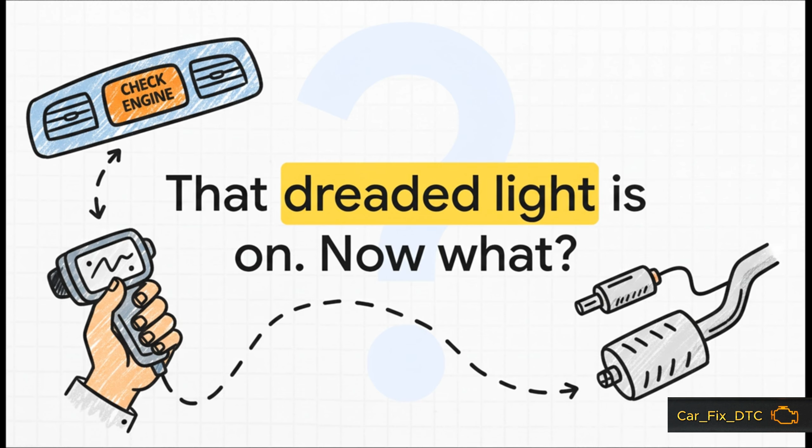So there it is, that little orange engine light staring you down. You plug in a code reader and it spits back this cryptic message, P0135. Now, I know that sounds like technical nonsense, but it's actually a super specific clue. Think of it like the start of a breadcrumb trail, and right now, we're going to follow it all the way to the source.

Here's how we're going to tackle this. First, we'll crack the code itself to really understand what your car is trying to tell you. Then we'll line up the usual suspects, the parts that almost always cause this exact issue. After that, I'm going to walk you through a simple step-by-step diagnosis you can absolutely do yourself. And finally, we'll land on the most common fix. All right, let's dive in.

Okay, first things first. What is your car's computer actually trying to say with this code? Remember, an error code isn't just some random alert. It's a very specific message, pointing to a very specific system that needs your attention.

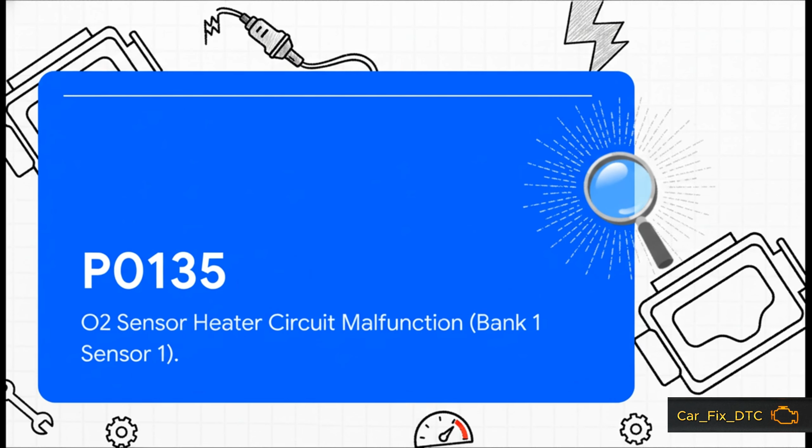So, P0135 directly translates to O2 sensor heater circuit malfunction, and it even tells us exactly which one, bank 1, sensor 1. Now, the most important words here are heater circuit. That's our big clue. It tells us the problem isn't with the sensor's main job of sniffing exhaust fumes, but with the little electrical part inside that helps it warm up.

Yeah, you can think of your O2 sensor as having two really important jobs. Its main gig is to measure the oxygen in your exhaust. It sends that info to the car's computer, which then fine-tunes the air-to-fuel mix for the best possible efficiency. But for it to do that job right, it needs to get really hot really fast. And that's where its second job comes in, a tiny built-in electric heater.

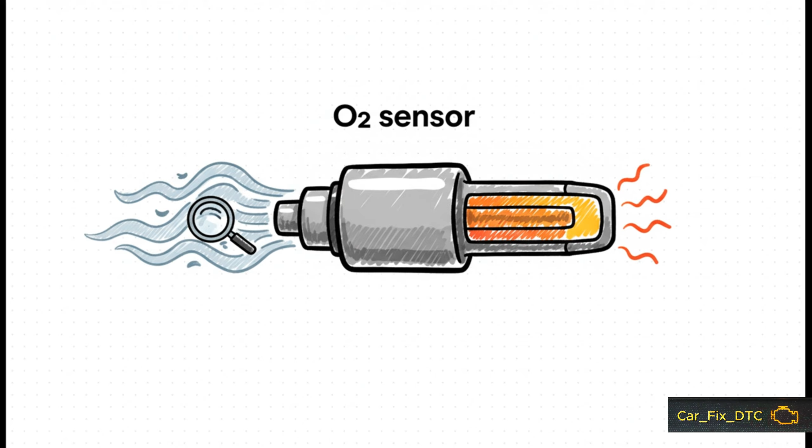So why is this little heater so important? Well, when you first start your car, especially when it's cold, the engine runs in what's called open loop. It's kind of like a default mode that's not very efficient. The heater's only job is to get that O2 sensor scorching hot, over 600 degrees Fahrenheit as fast as humanly possible. Once it's hot, the engine can switch over to its much smarter, much more efficient closed loop mode, which saves you gas.

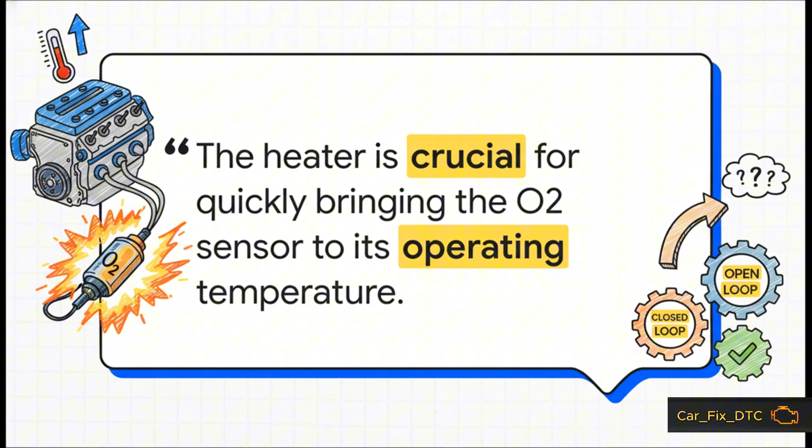Okay, so where do you find this thing? Bank 1 is always the side of the engine that has the number 1 cylinder. If you have a simple 4-cylinder engine, hey, you've only got one bank, so that's easy. And sensor 1 just means it's the first sensor the exhaust fumes hit, so it's located before the catalytic converter. You'll also hear it called the upstream sensor.

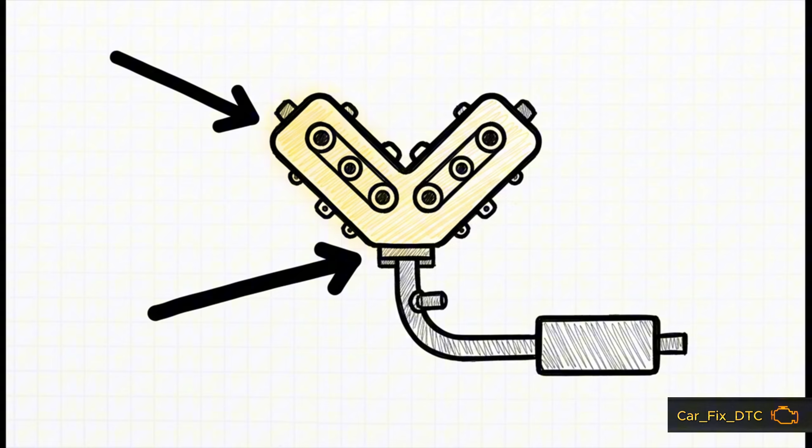All right, so we know what the code means, and we know where the part is. Now, let's move on to the fun part of our investigation, lining up the usual suspects and figuring out what's causing that heater circuit to act up.

Well, the numbers here tell a pretty clear story. A whopping 80% of the time, the P0135 code is pointing directly at a faulty O2 sensor. Simple as that. The internal heating element just gave up. The other, much less likely possibilities are some kind of wiring or fuse issue, and in super rare cases, a problem with the engine computer itself.

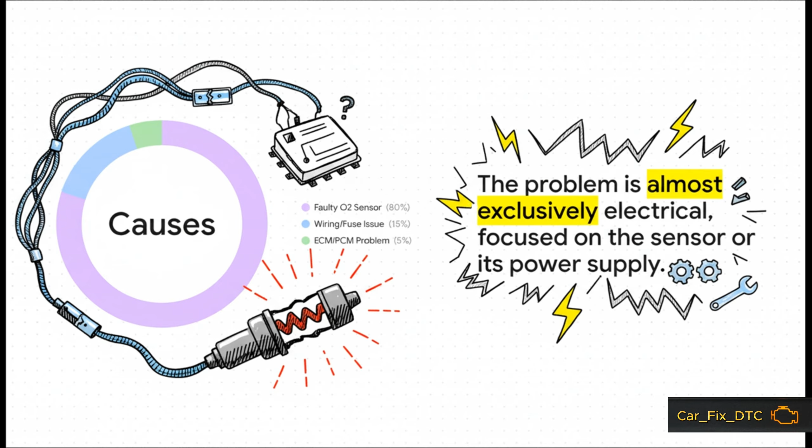But odds are, it's the sensor. And what are you actually going to notice when you're driving? Besides that check engine light, the symptoms can be pretty subtle. Because your engine is stuck in that less efficient open loop mode for longer, you'll probably see your gas mileage take a bit of a hit. You will almost certainly fail an emissions test, and you might notice the engine running just a little bit rough right after you start it up cold.

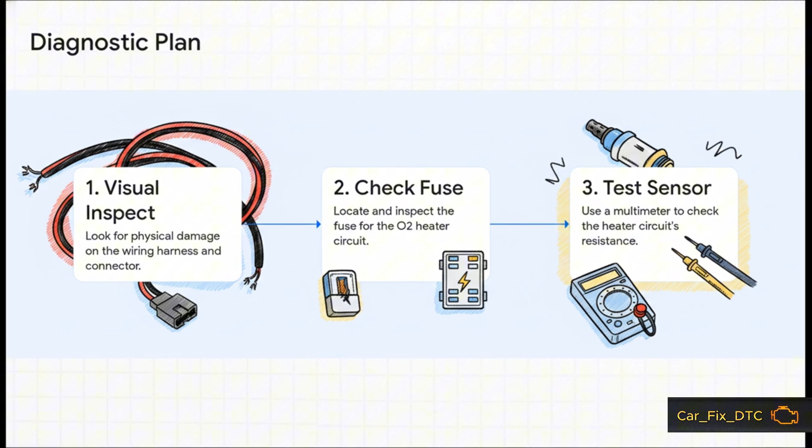Okay, now for the hands-on part. But don't worry, this is not nearly as complicated as it sounds. We're just going to follow a simple, logical process to prove exactly where the problem is. Let's do a little detective work. Our diagnostic plan has just 3 easy steps, and we're going to start with the easiest stuff first: a quick visual inspection of the wiring, then we'll check a fuse, and finally, if those 2 things look good, we'll do a simple electrical test on the sensor itself.

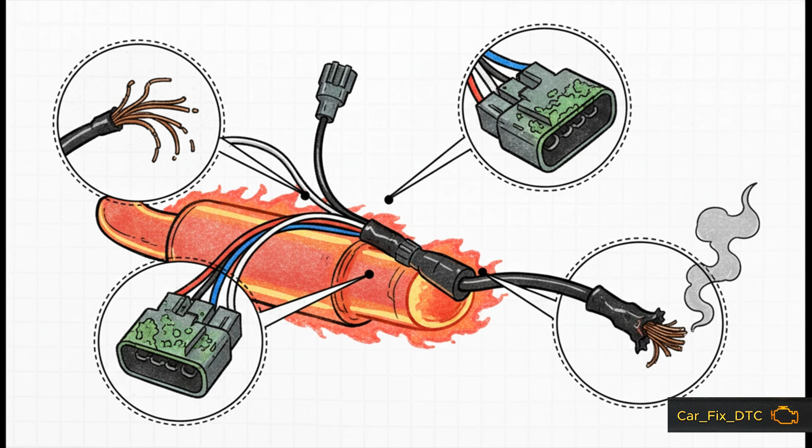First up, just use your eyes. Find that bank 1, sensor 1 O2 sensor, and take a really close look at its wiring. The exhaust area is a pretty brutal place. It's hot, it's dirty, so look for any obvious signs of damage. We're talking wires that look melted or frayed, or any of that nasty green corrosion building up on the pins inside the electrical connector. If all the wiring looks perfectly fine, your next stop is the fuse box.

Your owner's manual is basically your treasure map here. Look in the index for a fuse labeled something like O2 heater or A/F heater. Pull that little guy out and see if it's blown. If it is, great, you might have just found your problem. But if you replace it and it blows again right away, that tells you there's a short circuit somewhere in the wiring you just looked at.

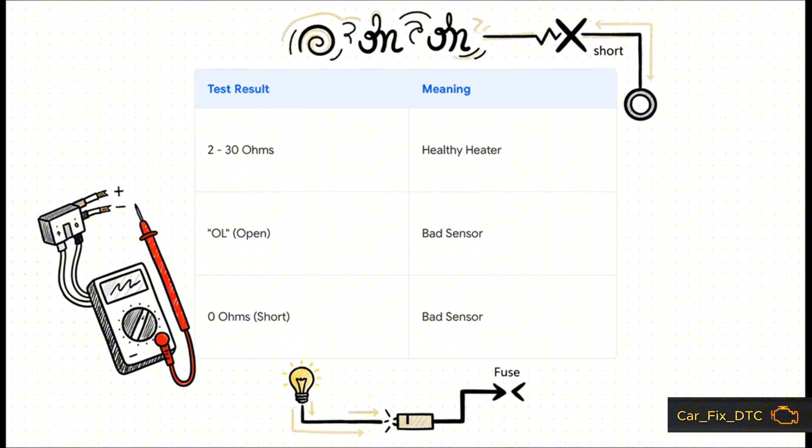So the wiring looks good, the fuse is fine, now it's time to test the sensor itself. Go ahead and unplug it and grab a multimeter set to measure resistance or ohms. On the sensor's plug, not the car's plug, touch your two probes to the two pins for the heater circuit. They're usually the same color, like two white wires. Now look at your reading. As you can see here, a healthy sensor should read somewhere between 2 and 30 ohms. If your meter says OL, which means open line, or it reads 0, you've just confirmed it. The heater inside that sensor is dead.

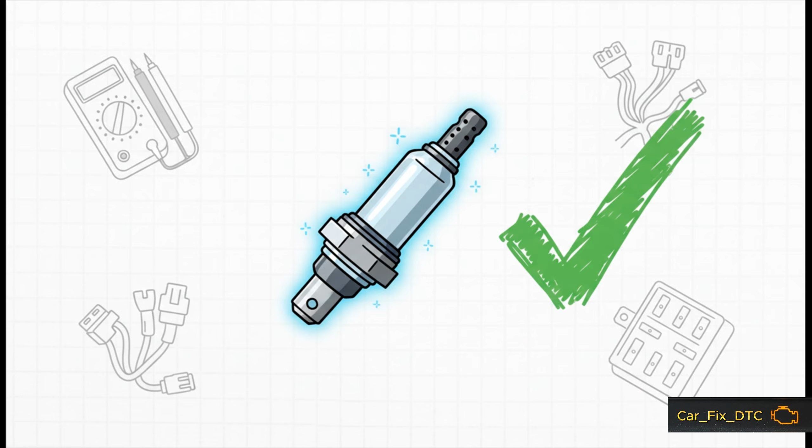So after that little bit of detective work, I'm willing to bet you have found the culprit. Let's move on to the final and most satisfying step, the solution. And here it is. 9 times out of 10, probably even more, once you've confirmed the wiring and fuse are okay, the fix for a P0135 code is simply replacing that Bank 1, Sensor 1 oxygen sensor. You've diagnosed the problem, you've isolated the bad part, and now you know exactly what needs to be done.

Now, to get the job done, you'll obviously need the new sensor. You'll also need some basic hand tools. But I'll give you a pro tip: these sensors can be in some really tight spots. You might want to get a special O2 sensor socket. It has a slot cut down the side for the wire, and trust me, it can make the job a whole lot easier. And that's it.

That mysterious P0135 code is no longer a mystery. You've just learned how to decode the message, diagnose the system, and pinpoint the exact solution. You've replaced confusion with confidence. So the only question left is, what part of your car are you going to master next?